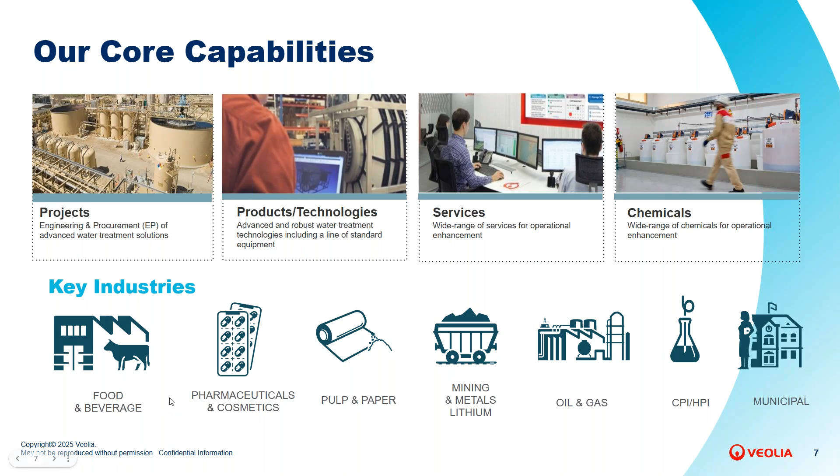Now, a little bit about Veolia. We're within the WaterTech version of Veolia. In that group, we focus on 4 key main areas: projects, products, technologies, services, and chemicals. And then we support various industries across the North American market here: food and beverage, pharma, pulp and paper, mining, oil and gas, chemicals, and also municipal.

Now we're going to get into our technical portion of our webinar, and we have 2 panelists joining us here today. The first one you'll be hearing from is Harrison Fowler, a specialist within our softening technologies as a sales engineer. He brings over 10 years of water and wastewater industry experience within Veolia, spanning pilot engineering, field service, applications engineering, product development, sales, and supporting municipal and industrial markets. Specifically, he's the sales manager for softening and oversees the equipment, sales, and product management for the various softening technologies, many of which you'll hear about today. His experience is full life cycle from design to execution, and he supports his clients readily with making sure those projects are successful from conception to execution.

Also with us today is Brian McGovern. He is an industrial business development manager, and he brings over 20 years of water and wastewater industry experience. He's been with Veolia for most of those years, with an impressive career spanning process engineering to business development to field service as well. He oversees Veolia's water treatment portfolio, including AnoxKaldnes moving bed biological reactors, biothane anaerobic technologies, and many, many more.

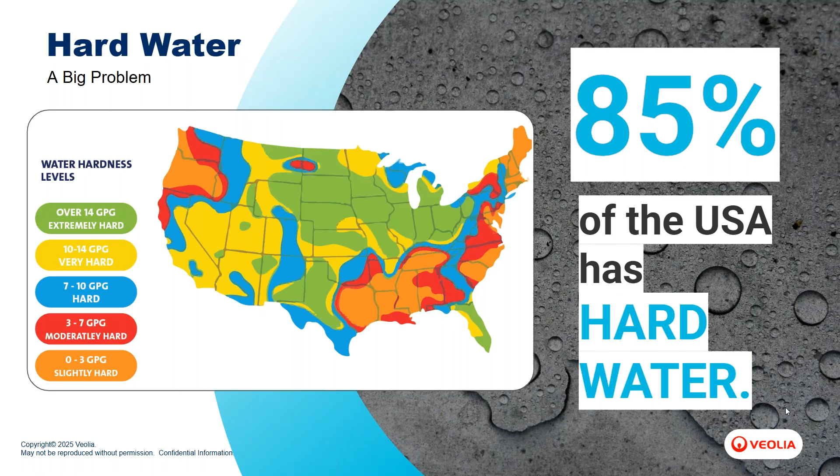So everything we're going to be talking about today is geared towards addressing some of these challenges that both municipal and industrial markets see.

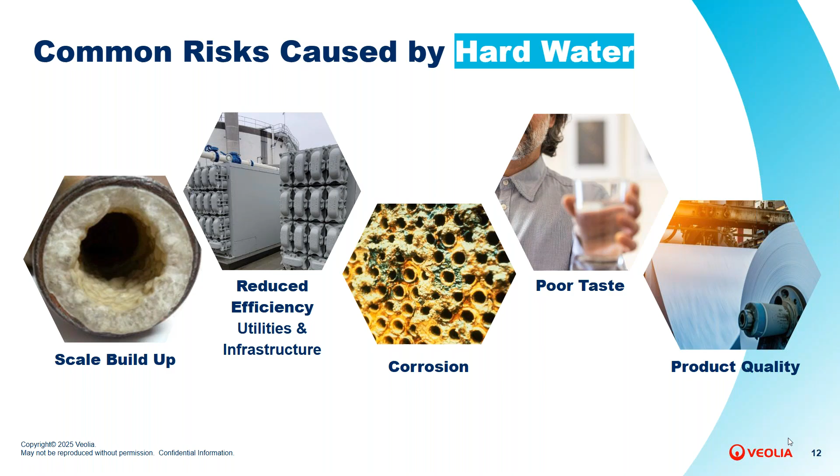Ion exchange is utilized heavily in the industrial market, somewhat on the municipal side. We also see on the municipal side quite a bit of point-of-use softening, in-home softeners, which can create their own set of challenges down at the wastewater plant and other areas. Nanofiltration and RO, membranes definitely have their place in the softening market, particularly nano and reverse osmosis. That's primarily used in the industrial market, but we see quite a bit of growth on the municipal side as well in the membrane space for challenging-to-treat waters, brackish waters, and things of that nature.

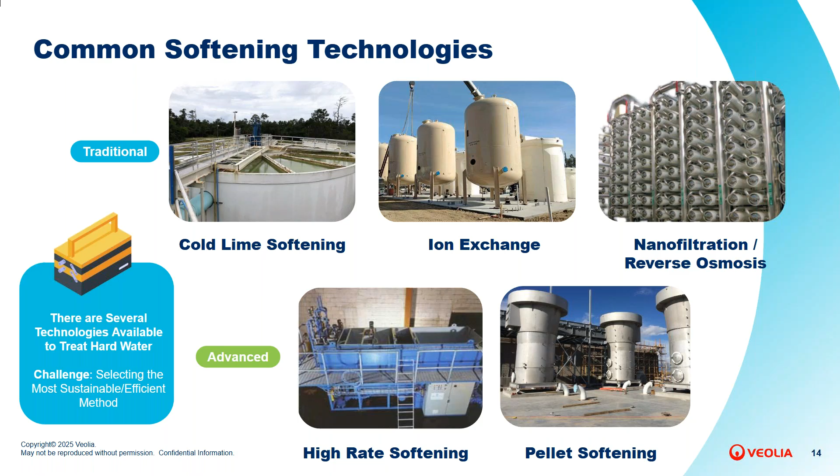Followed into additional softening technologies - both of these are still considered precipitation-based technologies, such as lime softening. A little different way to do it: small footprint, high rate, more specialized niche treatment. But at its core, these four softening technologies really represent the current state of the market and how we can approach softening.

The one that everybody knows probably the most in these markets is cold lime softening, a chemical process using a clarifier. Lime is injected either as flaked lime or an ultra-high-purity hydrated lime system. It's very cost effective on the equipment side. You can treat a large volume of water, groundwater or surface water. You can remove multiple contaminants such as calcium, magnesium, silica, sulfate, and other various compounds.

The challenges with this process in particular would be around residuals management, or waste management. You generate a sludge, and that sludge has to be handled, thickened, dewatered, and hauled. Traditionally, sludge is disposed of either in landfills or through land application, but as the market grows, lime has gotten more expensive.

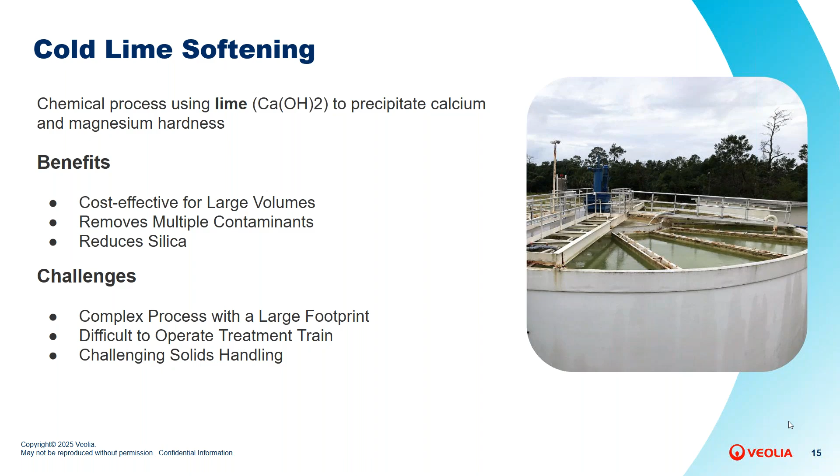Residuals management has also gotten more expensive, both on the handling and the hauling. And it can be, in certain situations, a difficult process to control.

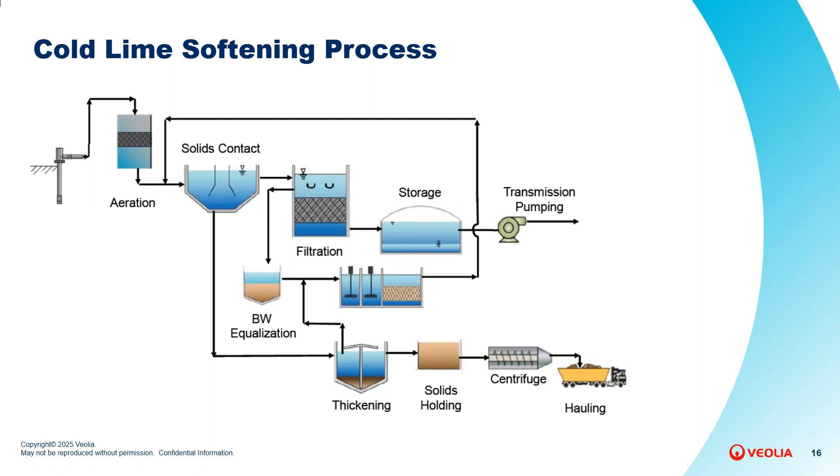Ion exchange is the next traditional softening technology. It is used at scale in the industrial markets and also municipal markets in some settings. Traditionally, these are pressurized vessels with a resin specifically made for calcium and magnesium removal. Typically, it is used with a sodium or potassium ion regeneration step, where you make down a brine, and you regenerate the resin media every so often to maintain media integrity and consistent softening. Challenges with these systems include resin regeneration and cost and/or replacement over time.

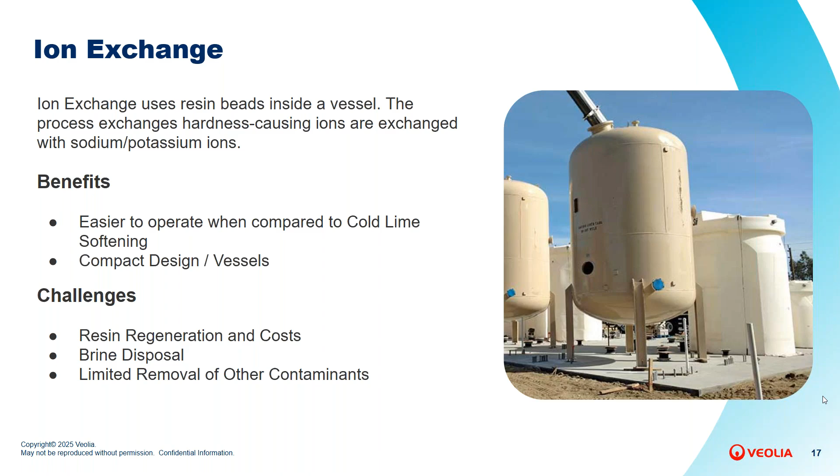The brine generated by this process is traditionally pretty difficult to handle. When discharged to sewer or other places, it is a very heavily chloride loaded side stream, if you will. And then it's traditionally pretty specialized to softening, so if you have a large amount of other contaminants, they can cause a detrimental effect to the resin within the vessels.

Nanofiltration, reverse osmosis membranes, if you will. I'm sure everyone on this call has spent some time around membranes at one point or another, but it is a physical separation process in that water is pushed under high pressure through a membrane. Certain ions are separated away from others. Clean, soft water passes through these membranes, while other hardness, ions, metals, and dissolved solids are rejected into a membrane stream. These are easy to operate. You have a wide range of contaminant removal, and you have very effective hardness removal that could allow you to run blends, reduce the amount of waste, etc.

Some challenges around membranes include high energy costs, membrane fouling, cleaning, and replacement based on the water you are treating. Potential pre-treatment steps are involved going to membranes, whether that's UF or other separation pretreatment technologies. And again, you still do have an element of a liquid waste stream, a continuous waste stream that is very concentrated and needs to be disposed of. Methods of disposal include side stream treatment of that reject stream, hauling, and/or discharge to sewer.

Good afternoon, everyone. As Harrison had mentioned previously, we talked a little bit about cold lime softening. And here at Veolia, we look at optimizing technologies in order to reduce footprint and capital costs for our customers. So on high rate hardness removal technologies, we have quite a few offerings and a couple of different clarifier options that we're able to employ, such as our ActiFlow clarifier, our Densator clarifier, as well as our MultiFlow clarifier.

And the benefits of these is, again, compact footprint. We're able to have high loading rates. Surface loading rates are increased as compared to a traditional solids contact clarifier. With these clarifiers, the tanks and the overall clarifier system have an integrated coagulation, flocculation, and settling tank integrated into each of the clarifier designs, which basically helps us control the injection and mixing of the proper chemistry needed for cold lime softening. It produces a flock that is easily settleable in the clarifier section. Each of these clarifiers is provided with a complete detailed control panel with fully automated operation.

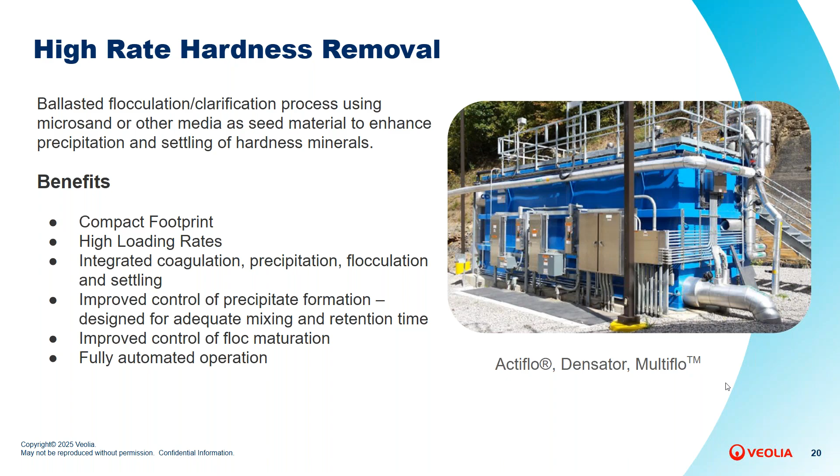The first clarifier we offer through Veolia is our ActiFlow clarifier. This is a ballasted clarifier where we use sand as a ballast, which is recirculated to a hydrocyclone and then injected into the flocculation tank. So for lime softening, we have an initial softening tank where raw water enters, and we have turbine mixing with lime and caustic soda possibly added for raising the pH and introducing the calcium.

And then we have a coagulation tank where we will add possibly a small amount of ferric chloride to introduce a coagulant. Then the flocculation tank is where that micro sand combines with polymer that we inject to produce a dense flock, which then settles into the settling tank or the clarified water tank. The effluent water then flows through lamella tubes and out to a common effluent for the clarified effluent water. Typically on the backside, depending on pH requirements, we can add acid injection so the actual operating pH coming out of the clarifier can be close to neutral so it can be discharged.

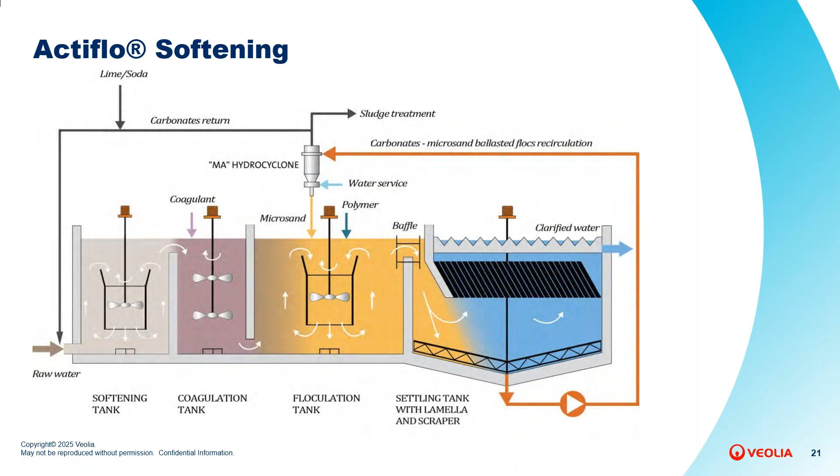So the actual operating pH coming out of the clarifier can be close to neutral so it can be discharged.

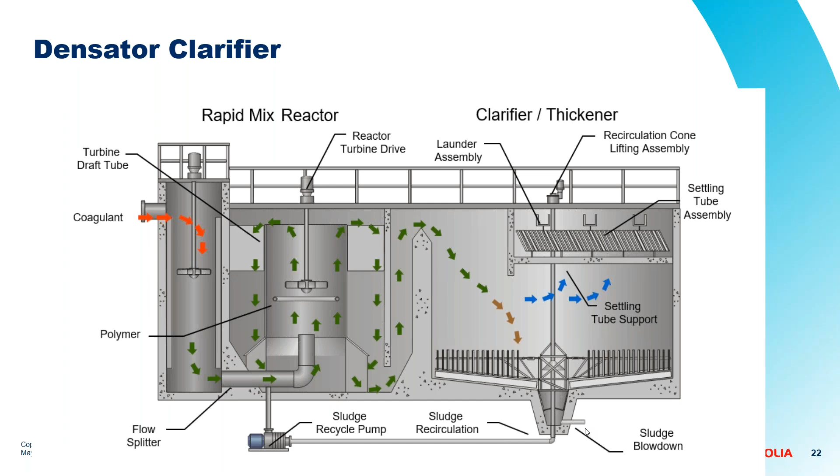A thickened sludge settles in the bottom of the clarifier. Under softening applications, the sludge can be anywhere between 3 and 10% solids, so it's a very thick sludge that is produced. There's no need for additional thickening. The sludge off of these clarifiers can go directly to a plate and frame filter press, typically under softening applications.

We also have another version, which is our multi-flow clarifier. The big benefit, this basically operates very similar to the Densator. With this offering, the multi-flow, we have standard configured clarifiers that can be manufactured in our facility in Canada and delivered directly to the site. So these are basically packaged clarifier units that can be provided for a softening application.

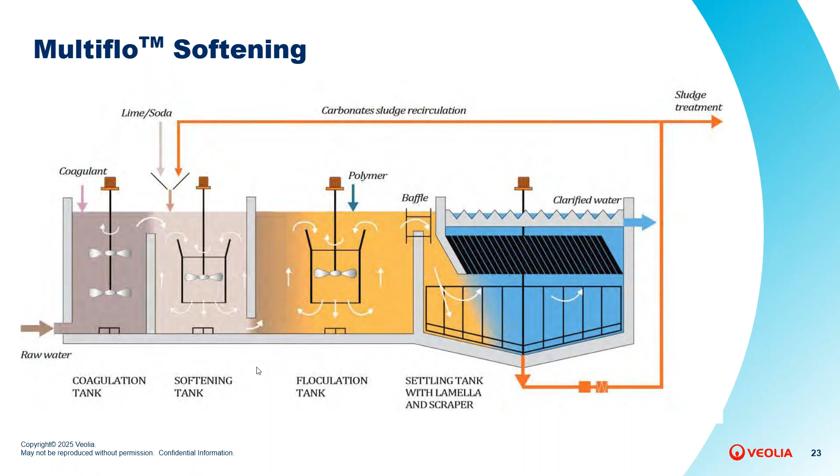Just to show some comparisons of the performance of each of these systems, each of these clarifiers has a high maximum rise rate or maximum rising velocity. With our ActiFlow softening, with the addition of the ballast and the sand, we're able to reduce the overall footprint because the overall rise rate is typically in the range of about 30 to 32 gallons a minute per square foot. A traditional solids contact clarifier could be anywhere between about 0.5 and 1 gallons per minute per square foot.

So again, it's reducing the footprint. The sludge concentration - basically the sludge that is recirculated to the hydrocyclone combines and is then sent off to the solids dewatering applications.

With our clarifier, we see reduced effluent concentrations, typically in the range of less than 5 to 10 milligrams per liter of TSS, which could be equivalent to less than 1 or 2 NTU. For hardness removal, we're typically seeing less than 35 milligrams per liter of calcium, as well as less than 50 milligrams per liter of magnesium.

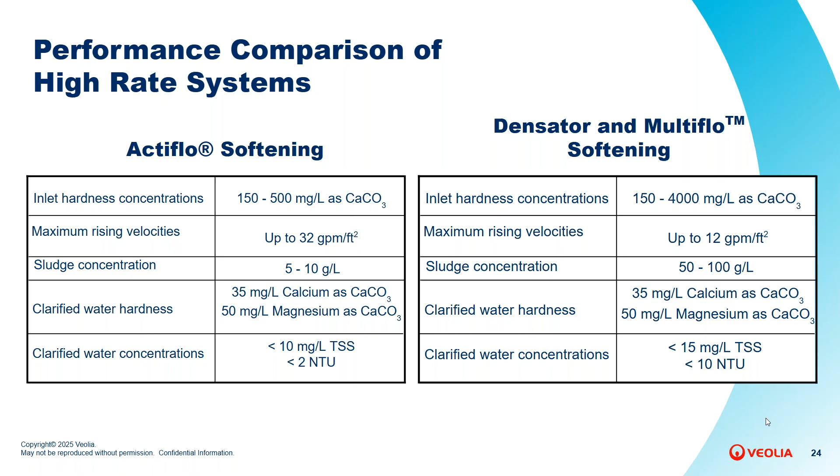Just to show a little bit, this shows kind of a conventional precipitation softening or a solids contact clarifier, which is around 0.8 gallons a minute per square foot. In yellow, it shows basically the footprint of our Densator and multi-flow softener applications, which is designed around 12 gallons a minute per square foot.

Reduced in the blue is the overall footprint of our ActiFlow softener, which is in the range of 30 to 32 gallons a minute per square foot. The cold lime softening up top shows a traditional solids contact clarifier that Harrison had touched on earlier. Below shows some of our ActiFlow or multi-flow package units that are able to be provided to a customer for a softening application.

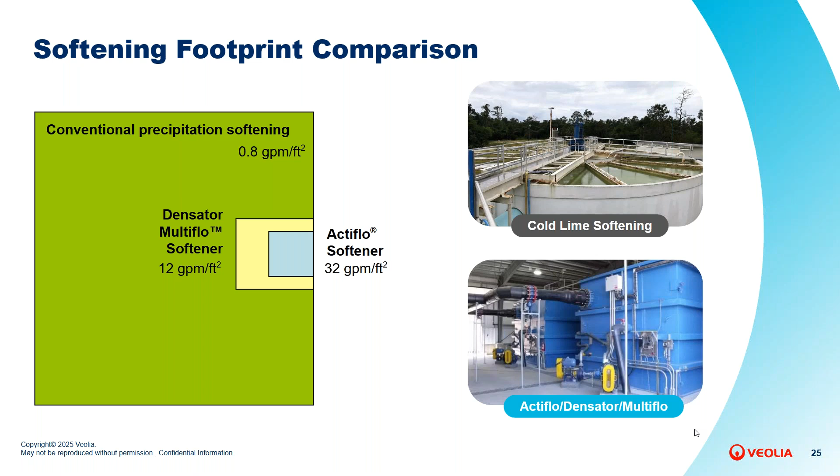One case study I'd like to touch on regarding a softening application is our Lodi Energy Center, which is out in Lodi, California. This was a plant that utilized our densator clarifier for softening.

The Lodi Energy Center was looking to expand from 50 megawatts to 300 megawatts, and based on that expansion, they needed additional softened water for the process, requiring approximately 2.6 MGD, or 2.6 million gallons per day. This facility was utilizing municipal wastewater from a local wastewater treatment plant.

We're looking at reducing the overall hardness as well as silica in the water so it could be used at the facility. This design was using a combination of both cooling tower blowdown as well as the effluent wastewater from the municipal wastewater treatment plant. Overall, the design of the system is for about 2,000 gallons per minute.

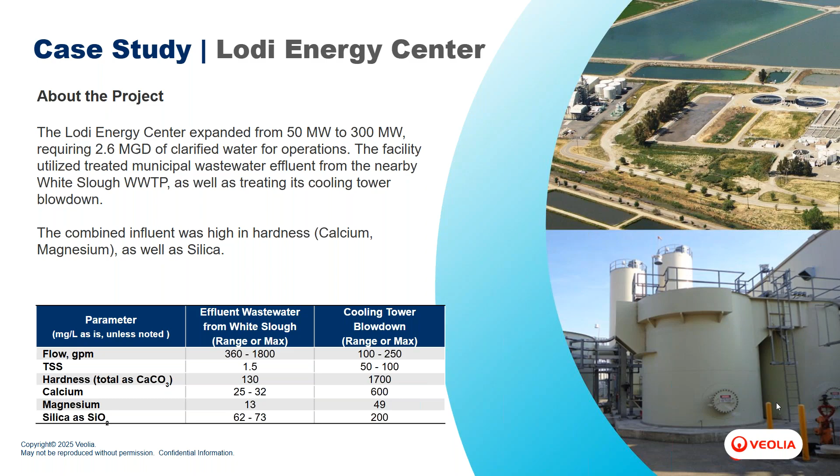With combined hardness, calcium, magnesium, and silica requirements, and based on the magnesium in the influent water being significantly reduced, supplemental magnesium for the overall process to remove silica is required. We used magnesium oxide as an alternative to provide supplemental magnesium to facilitate the adsorption of silica.

So this is just an overview of the process flow. We take the treated, tertiary treated water, and it goes through the densator clarifiers. There is one common rapid mix tank, and there are 2 clarifier trains that were provided.

The effluent water is then sent either to plant service water or to a demin system for UF, RO, EDI for boiler feed water, as well as sent to evaporative coolers. Again, as I mentioned, for chemical addition we're adding lime.

That lime is then removing the soluble calcium and removing the soluble magnesium. We had to add supplemental magnesium in the form of magnesium oxide to remove silica, added a flocculant, a polymer, to enhance the suspended solids removal, and added sulfuric acid for final pH adjustment.

The picture up top just shows the effluent water quality coming off of the densator. You can see the inclined lamella tubes for settling flows over to V-notch weirs, and the effluent is then collected and goes to a storage tank.

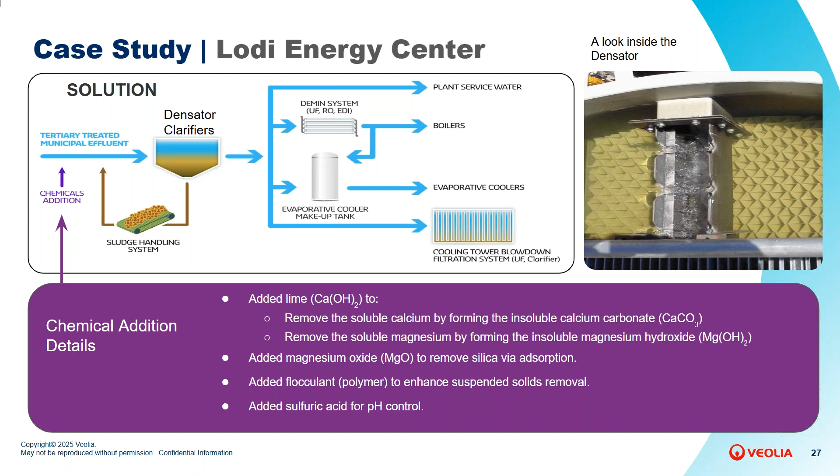The results from our performance test that we had performed, we had to meet certain criteria. We had to meet calcium less than 60 milligrams per liter, and we were below that requirement at 59. The magnesium less than 5 milligrams per liter, we were at less than 4.1.

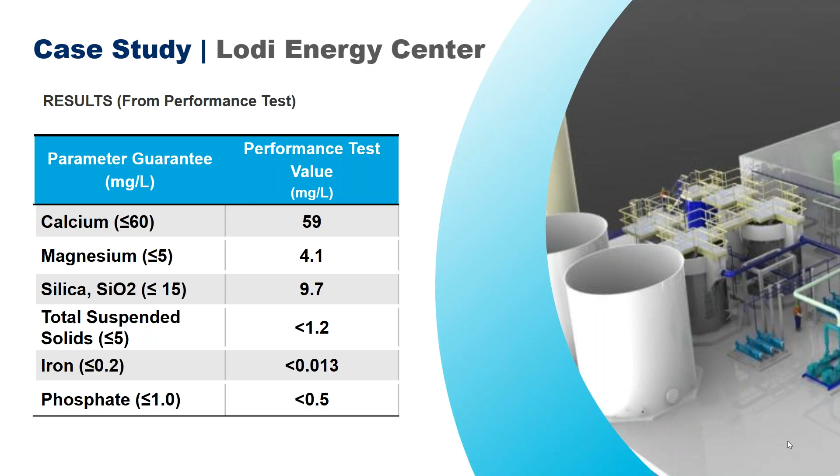Silica removal less than 15 milligrams per liter. With the addition of supplemental magnesium, we were able to meet that by providing less than 10 milligrams per liter silica. Suspended solids guarantee, we had to be less than 5 milligrams per liter, and our performance showed that we were less than 2 milligrams per liter, as well as an iron and phosphate removal guarantee that we met pretty comfortably.

And now I'll hand it back over to Harrison, who's going to focus on one of our other high rate technologies, which is our pellet softening Actina process.

Thanks, Brian. I appreciate it.

So Actina pellet softening at its core is a precipitation-based softening technology where we use caustic in the majority of our applications, sometimes lime if there is a specific TDS issue that we are looking at. But essentially we are using an upward flow fluidized bed reactor with a seed material of either silica sand or pure calcium carbonate material. We fluidize that material within the column.

We introduce a pH adjustment chemistry in caustic soda or lime, and we precipitate calcium, iron, and manganese out of solution and onto pellets. This particular process is very unique in the fact that it has an extremely small footprint. It runs at roughly 40 gallons a minute per square foot, and it produces a solid waste.

Within the reactor itself, there are no moving parts, no mixers, or anything of that nature. We are simply using the seed material, which is surface area available within the fluidized bed, to precipitate calcium out of solution and form calcium carbonate pellets.

The one thing to note here about this process specifically is that because we are able to produce a solid waste product, there is no dewatering necessary for that waste. We are able to discharge it from the reactor into a holding area that has screens in it, whether that's a bin or a hopper. The water drops out and you're left with a 95% dewatered waste product upon discharge to the waste area.

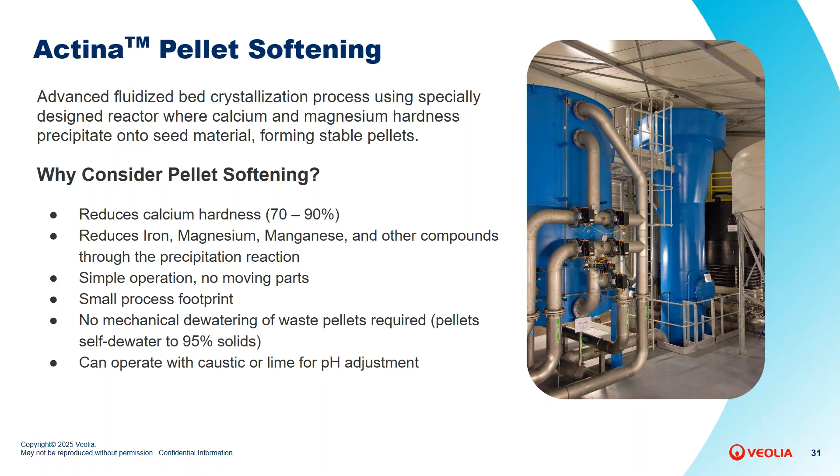Just a really quick PFD of what an Actina pellet reactor plant would look like. If you can remember a few slides back, the PFD of a lime softening plant, this was really a direct comparison to that, in which you have a well going straight to a pellet reactor. We have a stabilization basin to inject CO2, stabilize that water, and get down to a neutral water balance, filtration, storage, and transmission. Your waste product is simply blown to the pellet hopper and hauled off.

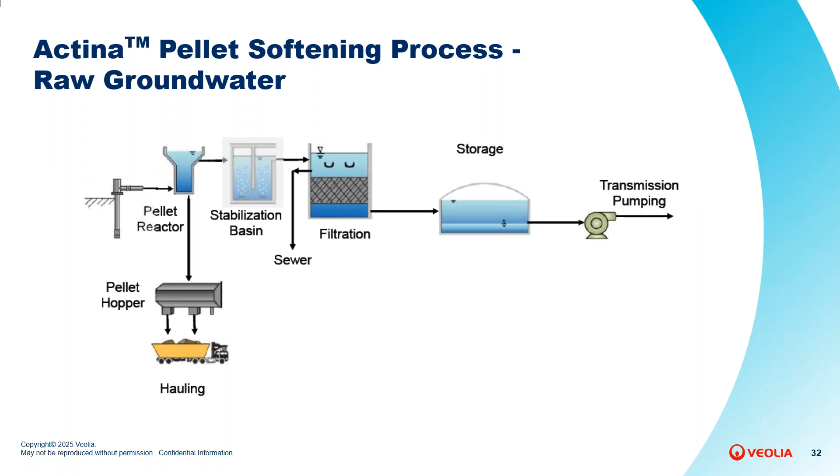The basics of pellet softening. So again, you heard me mention the fluidized bed reactor, which you can see in that column. We're pumping water under pressure into the bottom, going up through a nozzle deck, fluidizing that bed of seed material, whether it's silica sand or calcium carbonate seed, and we are precipitating calcium carbonate onto that seed and forming the pellets. You can expect a growth factor of 3 to 4 times what your seed size is into a mature pellet. With that crystallization and pellet formation, we are also able to trap iron and manganese there as well. So it makes it a pretty effective way to remove calcium, iron, and manganese from a water source and produces a nice solid waste that really is more of your sustainability-driven initiatives.

That's one of the biggest comparisons that we've seen to other types of precipitation softening is managing that waste product.

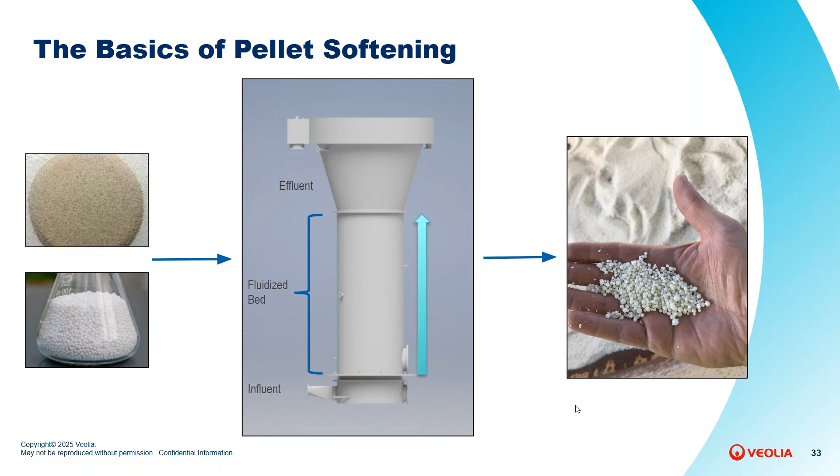So just a quick overview of what's going on in the reactor and the inputs and outputs. Again, you've got hard water coming in, going up through the flow strainer deck. You've got your expanded bed of seed and pellets. We're introducing pH adjustment chemistry in right above the nozzle deck, precipitating calcium, iron, and manganese out of solution and forming those pellets. Then you've got your seed makeup in, which will be your fresh seed, sand, or calcium carbonate, and then your pellet extraction or blowdown out. That is controlled by mass balance that we'll touch on in a few slides.

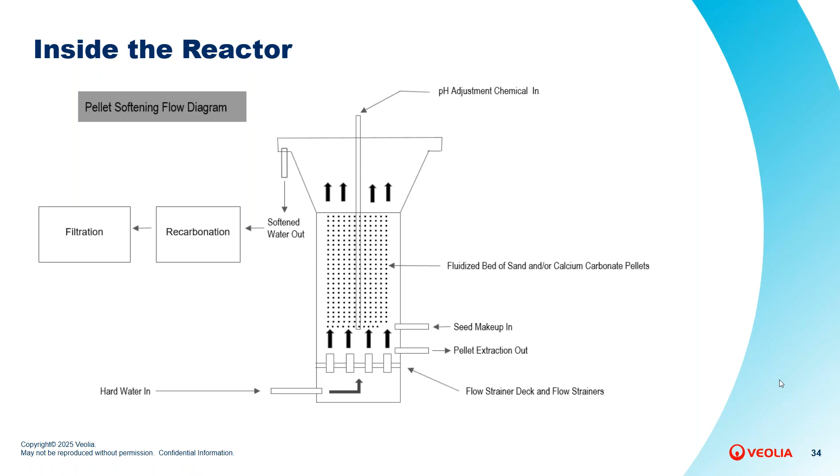Talking about flow distribution, from a pellet softening perspective, flow distribution is key for two things. It's even distribution of the flow coming into the plenum, ensuring that you have consistent flow across the cross section of the nozzle deck, and also to distribute chemistry. I'll touch on that on the next slide.

If you notice here, we have a breakdown of our nozzle deck, and you can see water going into that plenum, coming up through these nozzles that you see a cutaway view of. From there, we're using that rising turbulence, if you will, to pick the bed off the floor, keep it in fluidization or suspension, and then introduce chemistry in the base. When you talk about pellet softening, the nozzle deck is really the key to the entire process. In a sense, it's the beating heart of the process.

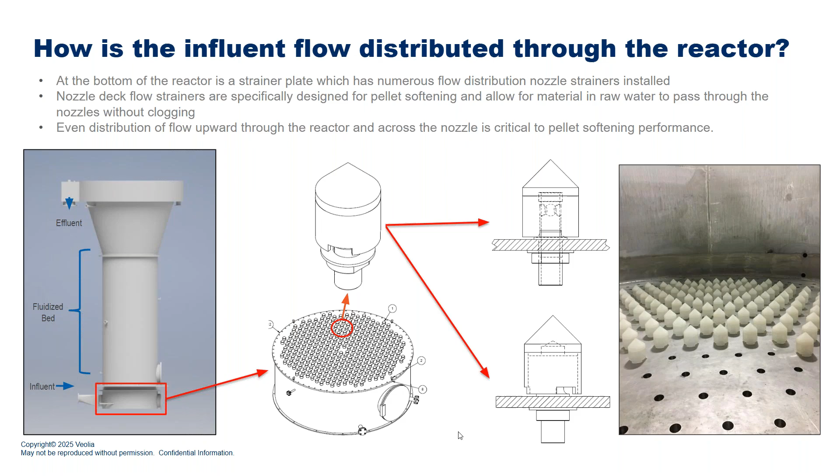Talking about chemistry, so you heard me touch on caustic. That is the chemistry of choice that we like to use from a design perspective. Really, what that allows you to do is maximize the rise rate through the reactor. It allows you to make those reactors smaller and fit into very tight footprints. The caustic reaction in hard water is very fast and efficient, so it allows us to pull 90% of calcium out or more in certain situations. And we use a couple of design points around that as well.

So we have a dilution water that we blend with caustic. We bring the blended caustic and the carrier water to the injection point under pressure and high flow, and it allows us to inject that pH chemistry, disperse it and mix it evenly at the base of the reactor above the nozzle deck, and really drives the precipitation reaction.

Within that, we have a removable injection device that we call a chandelier that we lower in from the top down, and that's where we're sending the chemistry into. What that allows you to do is actually keep a spare injection device or chandelier on the deck of the process and swap that out. So when you talk about maintenance and keeping the process going, by being able to remove the injection device, it does not force you to take the reactor down, empty the reactor, and fully clean it before you swap that out. That is something we've developed over time, and definitely with that plus the nozzle deck, that is really the key to the entire process: even flow distribution, even chemistry distribution, and ultimately an even precipitation reaction and pellet generation.

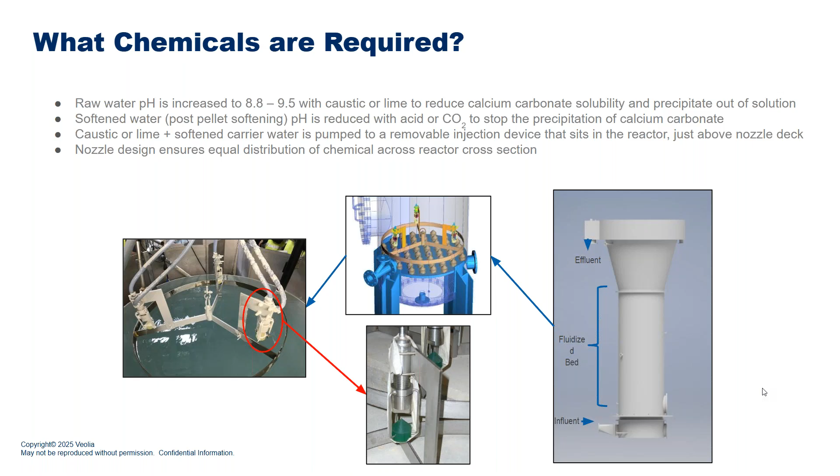Talking about seed management, whether that be sand or calcium carbonate, it really is driven by the size of the system and the demand of seed per day based on that mass balance. So anything from a hand-fed small eductor, bulk bag feeder, mid-capacity systems, or large systems where they require hundreds of pounds of sand a day, and we use an automated silo.

We really manage that effort through a combination of operator strategy and control strategy. We also include with our base offering a seed washer where we make a wetted slurry of that sand or calcium carbonate material, and then that is washed to remove all the fines, keeping turbidity consistent across the effluent discharge of the reactor.

Ultimately, that wetted slurry is sent from the washer to the process. Also, typically post-precipitation softening, no matter what process it is, there will be some element of recarbonation or post-softening pH control. In the municipal market, most of the time we see that done with carbonic acid or sulfuric acid. In the industrial space, more so sulfuric acid, though citric acid can be used, but typically that's what we see.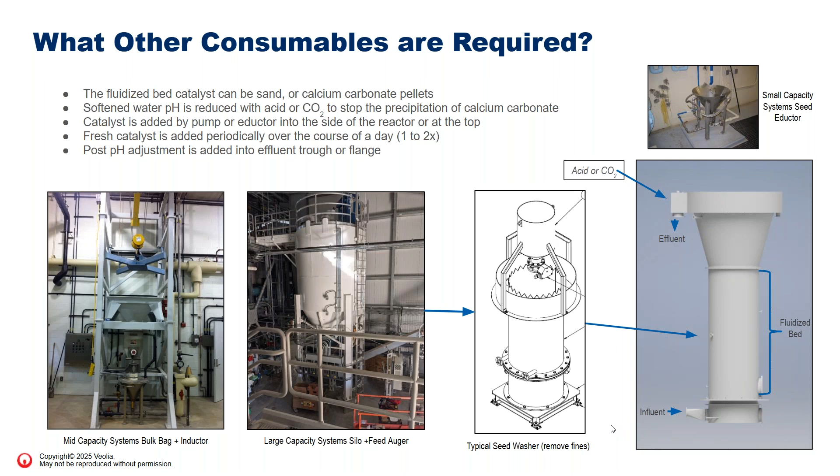Talking about managing the pellet bed, the system uses PLC-based controls on valves. We watch the pressure differential in both the intake plenum and the base of the reactor. As the bed grows, the pellets grow in size, the bed gets heavier, and it exerts more head loss against the inlet of the intake plenum.

The PITs track that pressure increase, and we use that coupled with a function of time to introduce blowdown strategy into the system. From there, it's managing the bed, where you introduce a certain amount of sand every day, once or twice per day depending on how the reactor is operated, and you blow down a certain amount of pellets in pounds per day.

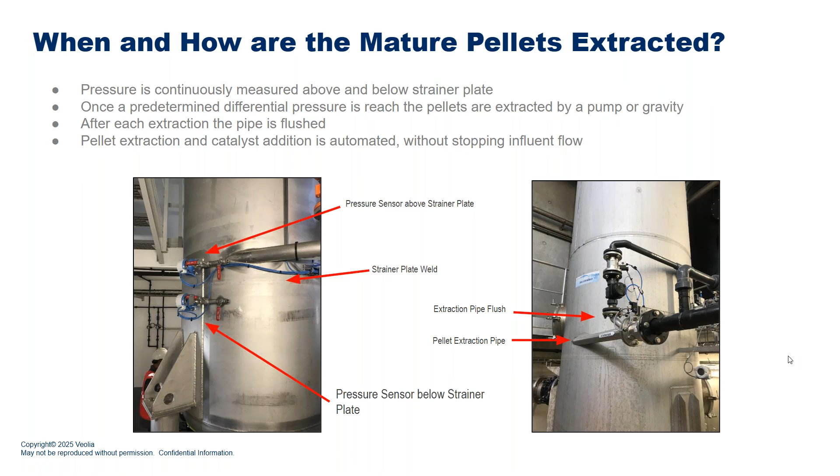Touching quickly on pellet handling, you can send these pellets to a roll-off dumpster with screens in them, or send them to elevated hoppers, as you see in the picture to the left. The water free drains out of the pellets, and you're left with a 95 to 99% dewatered waste pellet that you can haul off, land apply, or use for any other core functions you find.

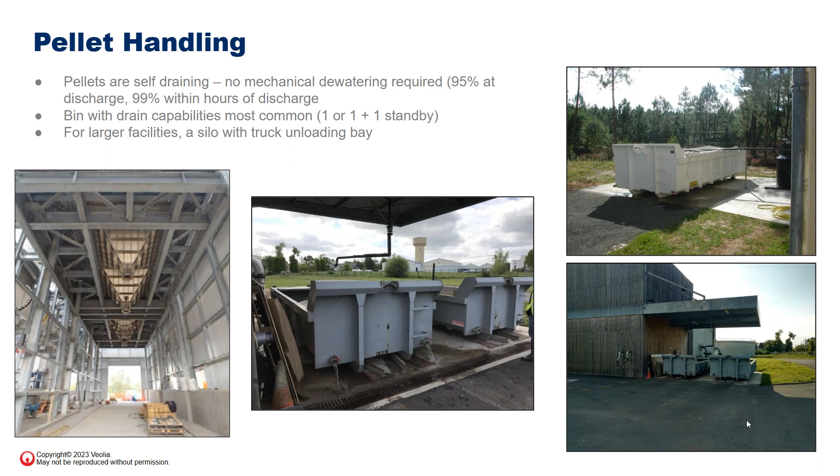Touching quickly on the pellet reactor's expected performance, it is primarily a calcium removal process, but we can also achieve significant removal percentages in iron, manganese, along with some sulfate and some fluoride removal.

The color of the pellets is driven by the amount of constituents present in those pellets. So with all calcium, you're going to see a nice white finished pellet. If you have a bunch of iron, you'll see pellets similar to vial A with that nice dark rust color. And if there's a bunch of manganese present, it will show up as a tannish, grayish color.

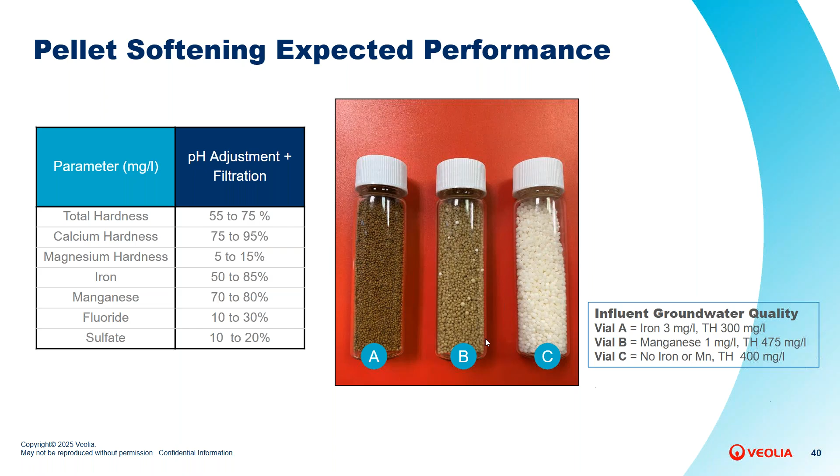Just quickly on waste for the pellets themselves, we do have one municipal source that uses pellets for agricultural calcium supplement. Other sustainability initiatives include fertilizer, building products, and public works use as well.

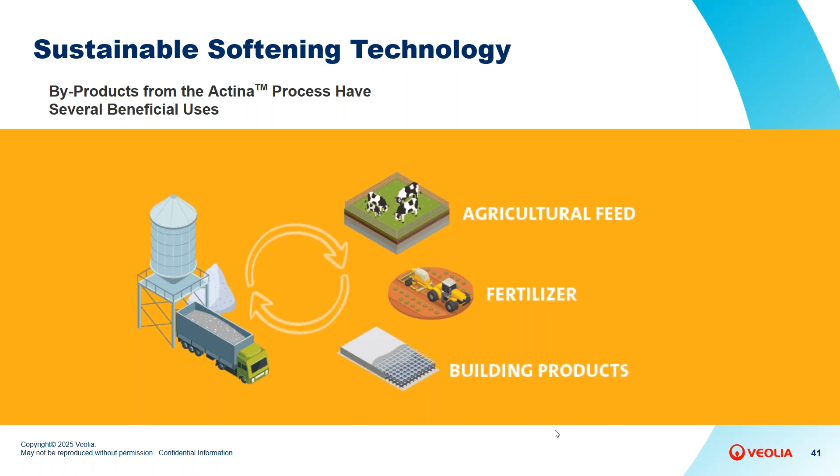Other examples of Actina pellet reactor applications include treatment for RO brine, softening that brine, and treatment for nano brine, sort of the same premise. Really, we're looking to remove all that calcium out of that source and potentially be able to introduce it to another process for reuse.

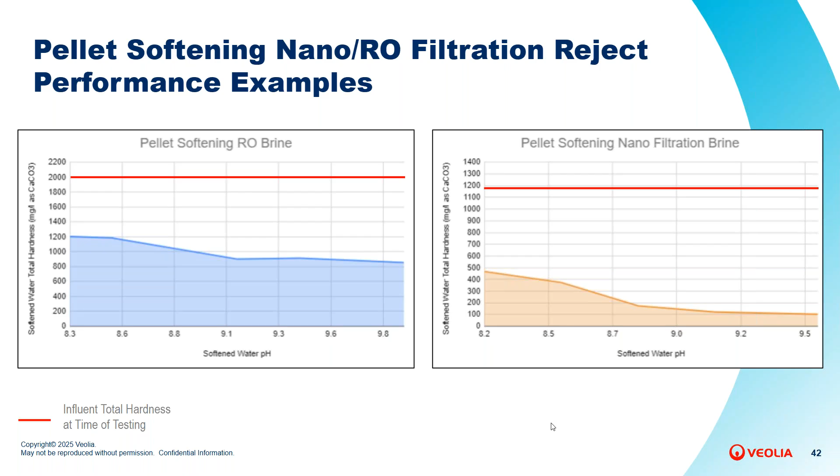This is just a quick touch on what the reactor looks like under operation.

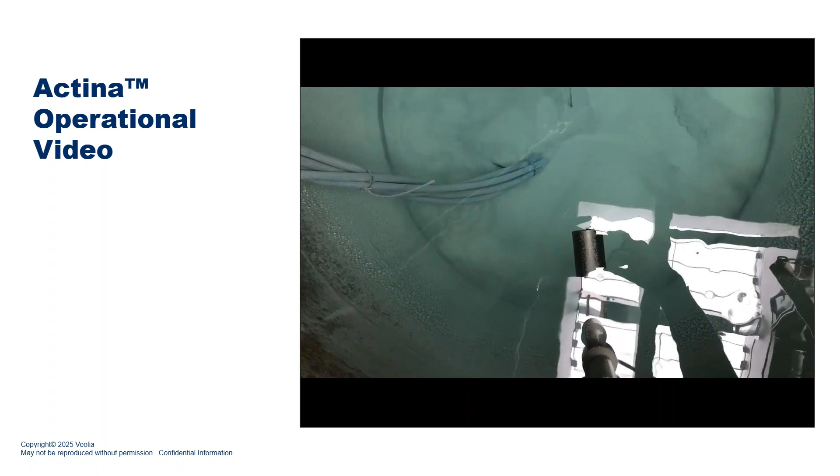You can see the chemistry going down to the base of the hoses. You can see the fluidized bed rolling, and you can see the clarified, softened effluent rising to the top.

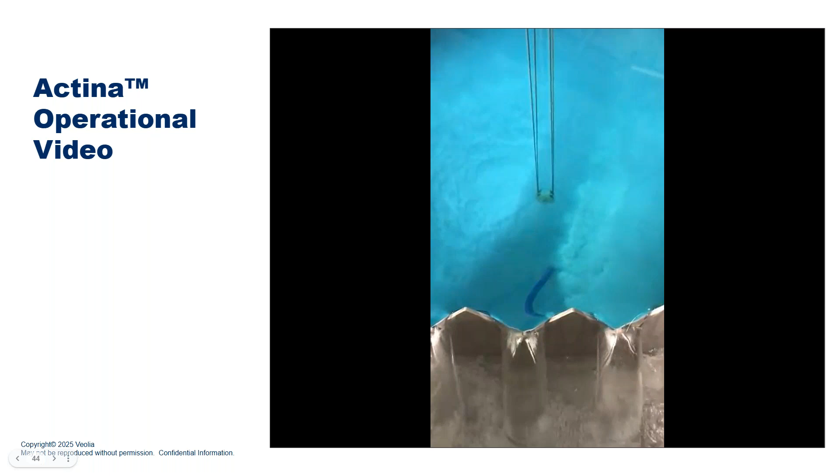A very similar video from a different installation, again highlighting that fluidized bed, the even mixing and even distribution of the pellet bed and the seed material.

Quickly touching on a flagship installation we have out in Denver, Colorado. South Adams County is roughly a 13.8 MGD drinking water facility. They have somewhere in the range of 350 to 400 milligrams per liter of total hardness coming in. This particular plant was driven by the need to soften.

They were not softening prior to introducing this expansion. Really, this was a combination of the utility, the ratepayers, the district, and the engineer coming together to come up with a very comprehensive solution to address their hardness issues. This process, by far and away, was the cheapest in both CapEx and OpEx to achieve their goals.

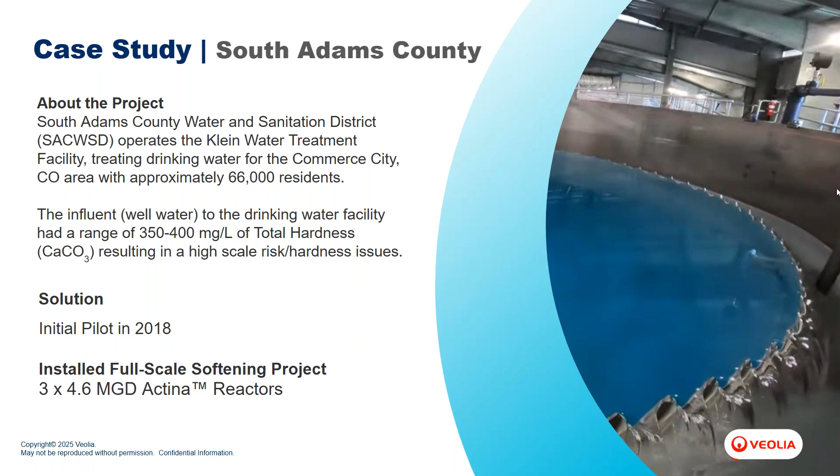Key points to note here: relatively consistent influent hardness, as this was a groundwater source, and very consistent effluent hardness, if you will - very targeted goals in terms of effluent hardness. But again, no liquid waste, and the ability to repurpose their waste product drove the decision making within this project.

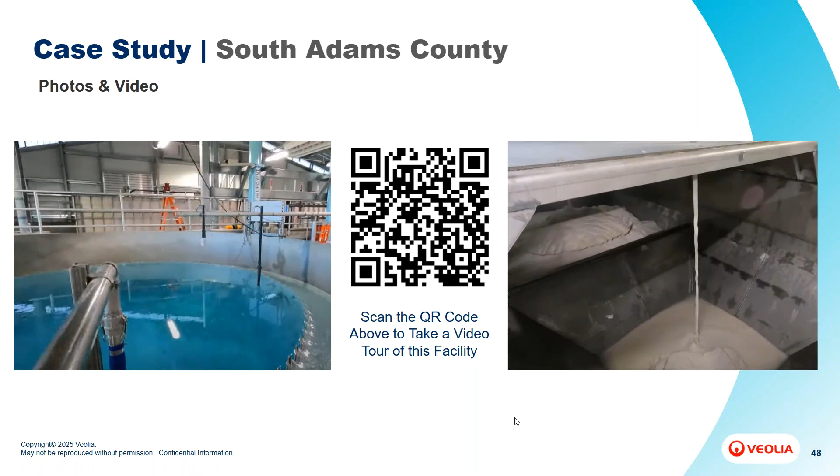So another industrial application: Actina was utilized in pre-treatment for process water makeup. Essentially, we were taking Actina, treating the water source coming into the facility, removing all the calcium out of that stream, and then sending it downstream to other industrial processes.

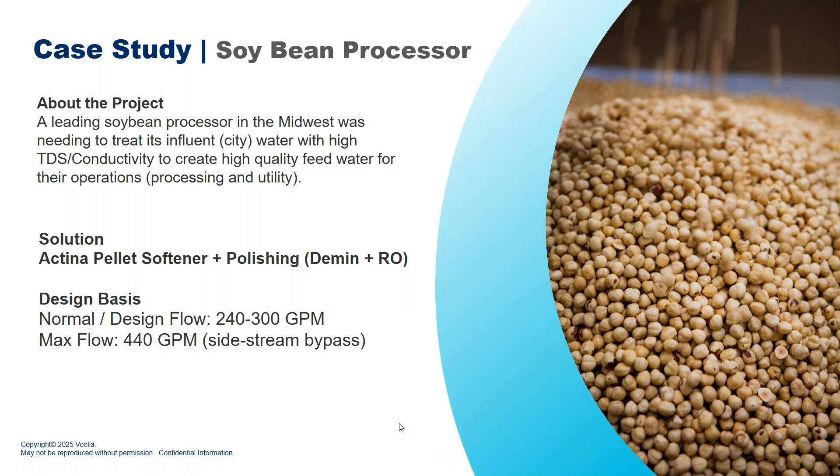And as you'll note, really the goal here was two things: process water makeup for the various components of that particular facility, and really sustainability in reducing the amount of liquid waste being generated by these water treatment processes, and ultimately trying to get all that calcium into a solid form before it ever made its way to the plant.

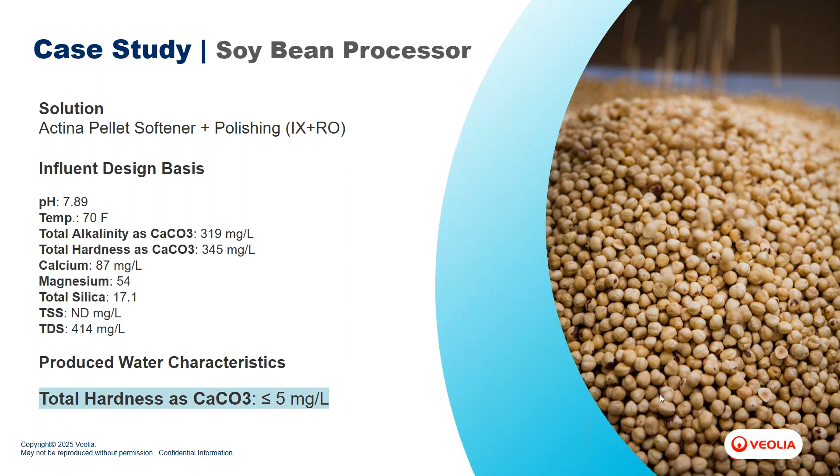So quickly, just getting started on a softening project - a couple of things to note here. Obviously, identifying your source water and treatment needs would be the first step. Determining the available footprint that you have, whether that be for a new process train, new plant itself, or an existing expansion of existing treatment.

Really taking a hard look at the TDS breakdown of your feed water stream and understanding what is present. That drives the decision making around what technology to use, and identifying those problematic constituents can definitely lead to a more optimized softening solution for your clients.

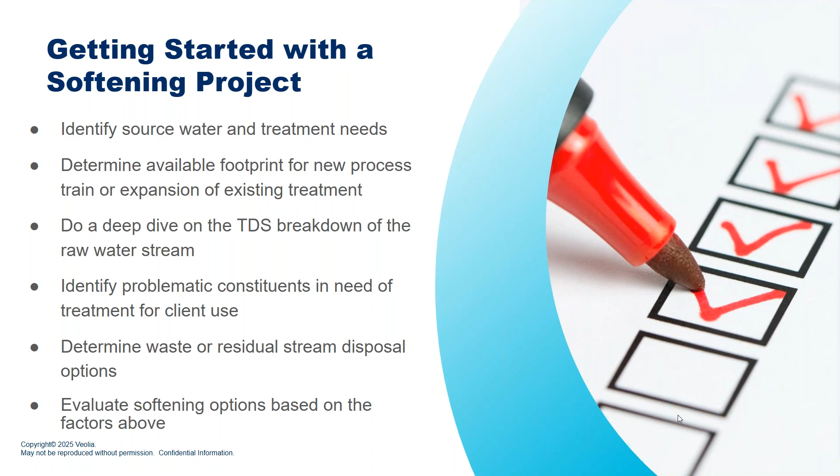Again, 4 key takeaways: the primary methods of softening are ion exchange, lime softening, RO/NF, and pellet softening. Within precipitation softening, you do have lime softening, pellet softening, along with your high rate solutions in Actiflo, Multiflo Soft, and Densadeg. Pellet softening is unique in the fact that it only removes calcium-based hardness, but it does produce that solid waste, so it can be a highly effective option when coupled with other treatment processes.

Raw water makeup and effluent targets are always going to drive your selection of the softening technologies. And at the forefront of sustainability - CapEx, OpEx, sustainability - what are you going to do with the waste? How are you going to handle that will be the key in selecting the appropriate technology for the application.